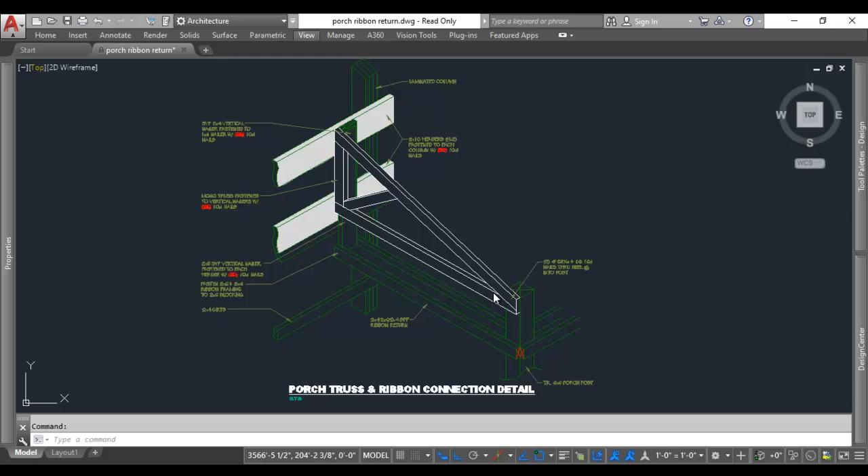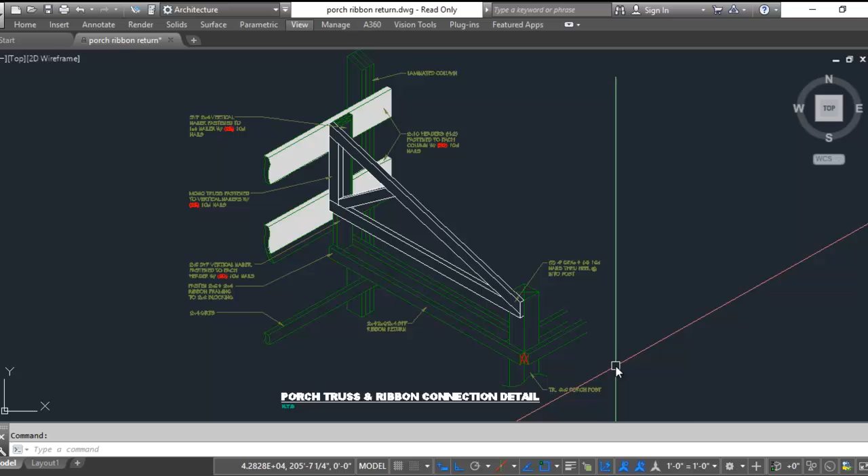Here on the screen I have what looks like just a 6 or an 8 foot porch that's tying into 2x10 headers at the high side. So let's say in this case maybe instead of having a porch ribbon, I just have a 2x12 header at the high side with no finishes on the interior of the porch, and maybe these headers are going to change to, say, 2x8s. So if that was the case and you wanted to be real accurate on your detail, it's pretty simple to come in here and make modifications.

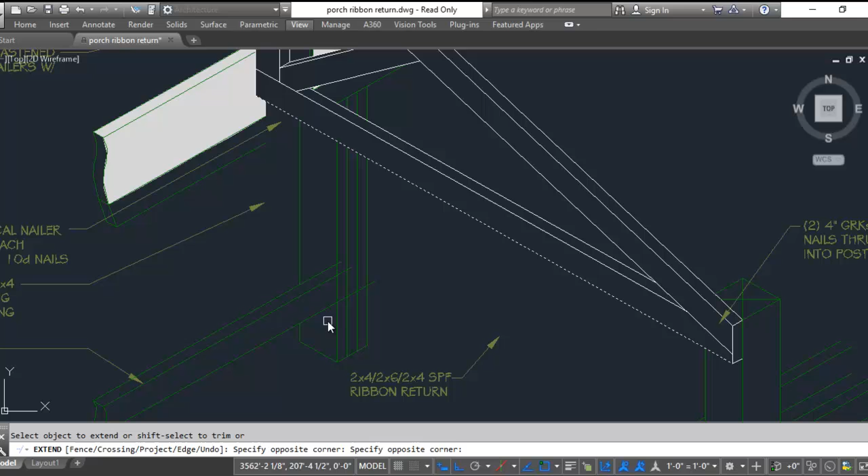The first thing would be to go in and eliminate this extra line work that you don't need. So I'm just going to use the erase command and erase these extra lines that we don't need, and then extend some of this line work up that we do need. Something like that. Now here, I'm going to erase these guys, extend up the post, and instead of erasing line work, if it's already in the right location, I like to reuse line work.

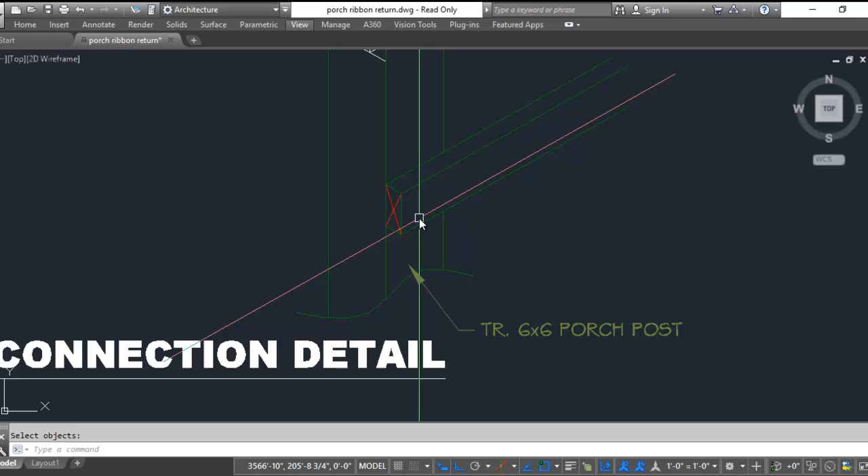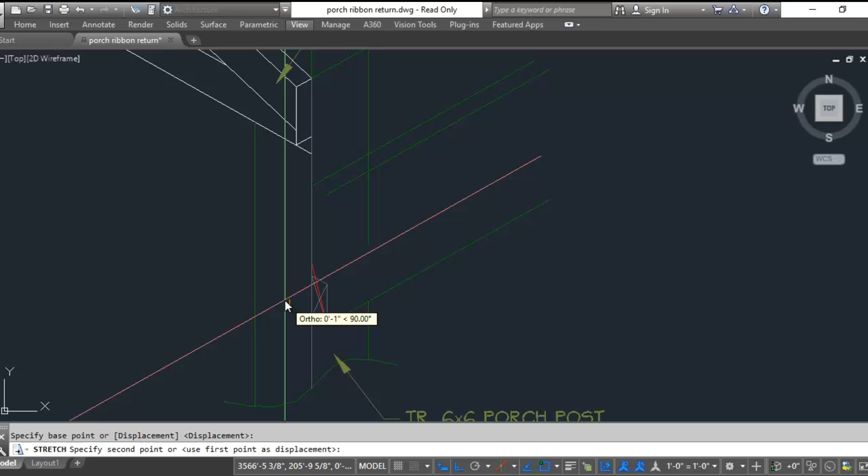So this is a 2x4. If I want to turn that into a 2x12, that would be 8, 9, 10, 11. I think I'd have to move this up 7 3/4, I believe. So I'll move those two lines up 7.75, and then that looks like an extra line. And then we can still use the stretch command, 7.75, and then use that distance to double check and make sure your dimension's right, 11 1/4.

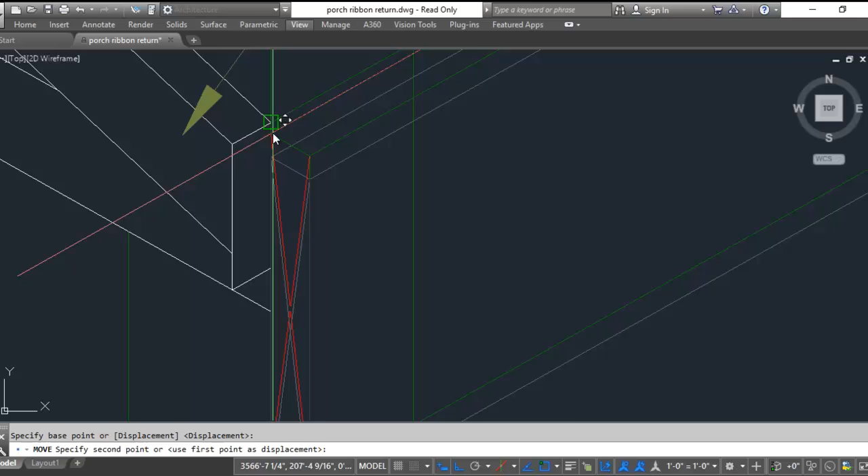So there I've created a 2x12, just reusing the line work that I had, and then I can move it up to the appropriate bearing height, whatever that may be. In this case I'm going to show it flush with the top of the truss. Or actually, if there was no overhang, it would be even higher, so let's take it up higher. Let's say there's no overhang. So we're going to take this all up 3 5/8. If you miss something, just grab it, take it up there as well.

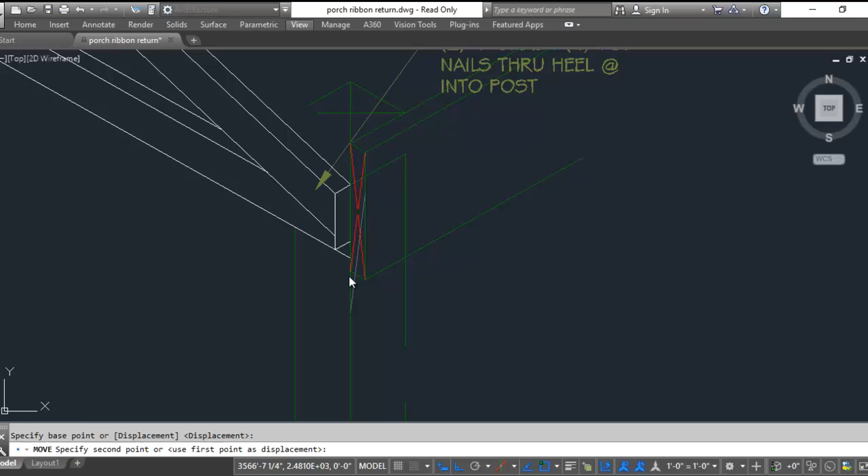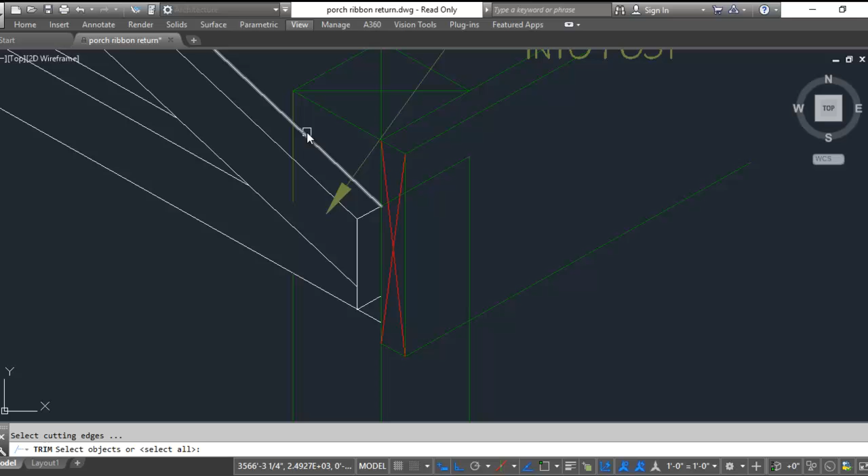And then once that's done, we may have to extend some more lines around to make this all work. So I'm going to copy this post around, bring those lines together, and add lines where I need to. And I do have Isodraft turned on. If you can see, my crosshairs are slanted at a 30-degree angle. Anything that's extra and unnecessary gets deleted.

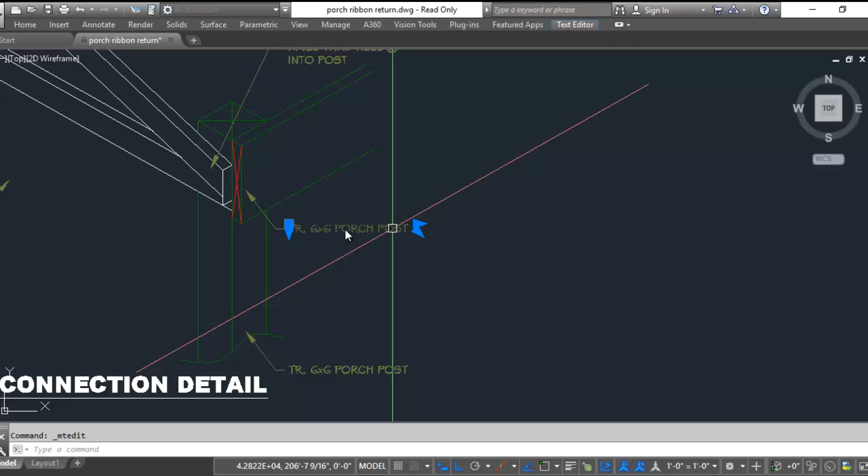Extend lines up. So here's an example of converting that non-bearing ribbon to maybe a single 2x12 header, and then I could add notations for the header fasteners right here. If I can get it to activate, which it doesn't want to, and it's locking up my computer. There it went. I will leave it. So we could add notes there.

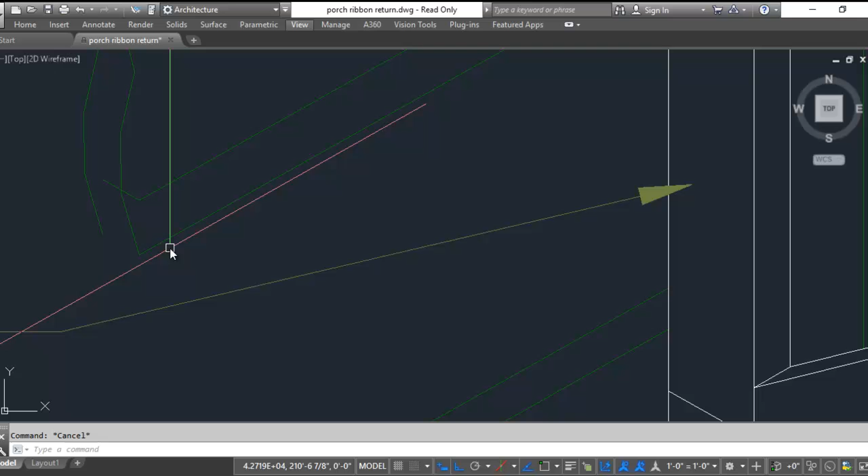Same story here. If I was going to change these headers to 2x8s, I'd have to get rid of my gradient hatch and then just simply move the bottom of that header up 2 inches, right? And there's an extra line there. Extend this guy out, move this guy over, and then trim off what's left behind there. Extend up our post. So that's how you'd switch it to a 2x8.

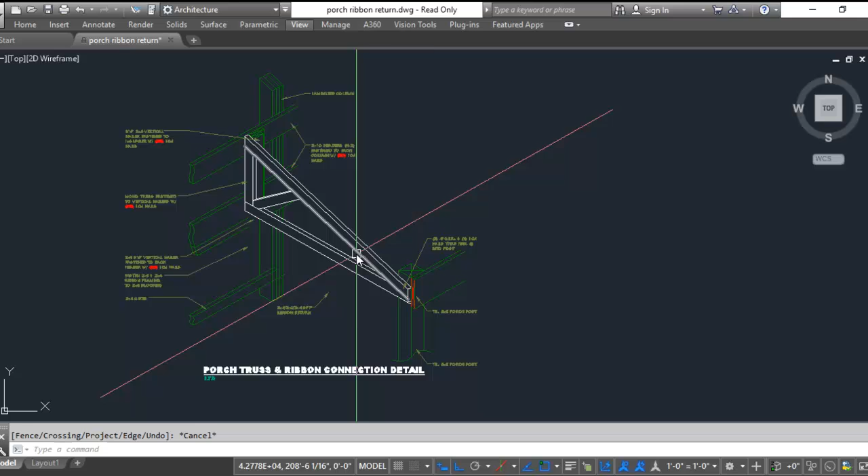We could do the same thing down here, but it's pretty quick to modify an isometric drawing. Just switch into Isodraft, delete what you don't need, and then modify what you have to get the correct result.